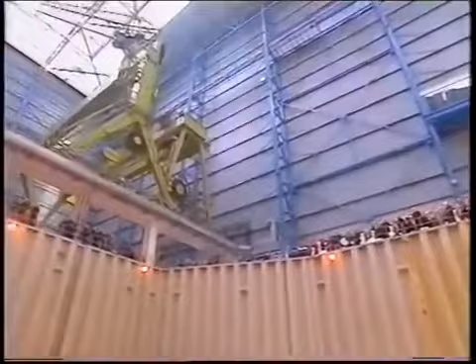The keel is to be laid. Job number 636 is also to have a name, announced by Tim Harris, chairman of P&O Cruises: after much thought, consideration, and consultation, we have decided that the right name for this ship is Oriana.

It is as if a flag has dropped to start a race. The band strikes up a quick march, and as the guests go upstairs to raise their glasses, the first sections of the new ship downstairs are lowered into place. Construction starts before a bowl of celebratory soup is served.

It was at the end of the 1980s that P&O took the first bold steps towards ordering the first cruise ship ever to be custom built for the British market. It would have to be the biggest and fastest for almost a generation. Long before the contract was signed in December 1991, P&O had their own team working in Germany.

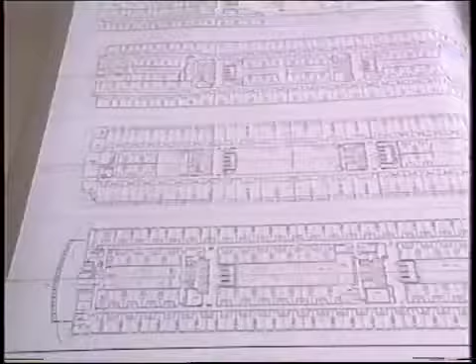Oriana is a ship with computers in her genes. Most of the design was done by computer, and computers will eventually run her. During construction, 15,000 documents a year are generated. For months, the ship has existed only on paper, in 6 loose-leaf folders codenamed Gemini.

Charles Arkinstall, Director of Fleet Services and one of the principal architects of the new ship: Well, this document really is the key to the successful building of the vessel, because they define in full detail what the ship will comprise of, how the shipyards will build it, and the standard to which they will finish it. It's a very important phase of the project because it's the complete definition of the vessel. The specification, which we agree with the yard, covers all aspects of the building of the vessel.

For example, we could look at the specification for painting the vessel, which we define page by page, how each of the different parts of the vessel will receive the paint treatment, which in the outline specification is probably covered in a few lines. Just on paint there are 22 pages, which converted into 22,000 gallons of paint.

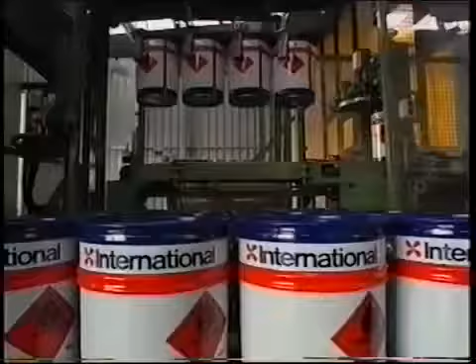The specification required it to be environmentally sympathetic. P&O insisted on products that were free of tar, tin and solvents. The paint was made in Newcastle upon Tyne.

Other parts of the ship came from all over Europe. The galley equipment from Poland, a village not far from the ancient city of Poznan. The stabilizers from Edinburgh. Carpets from Kidderminster, and engines from Augsburg in Germany. They were big diesels, built by MAN B&W, on the site where in 1897, Rudolf Diesel made his first engine.

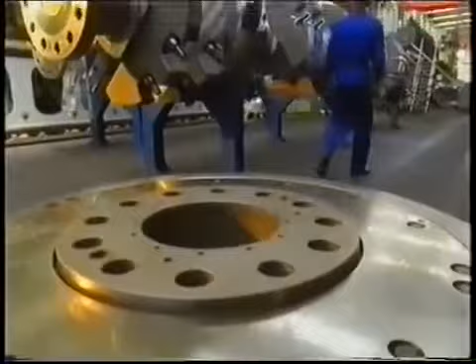Oriana's power plant is unique. She has 8 engines, 4 to propel her, and 4 auxiliaries generating her electricity. The main engines are massive. The 2 biggest at 216 tons are the size of small ships. All were run up to full power on the factory test bed.

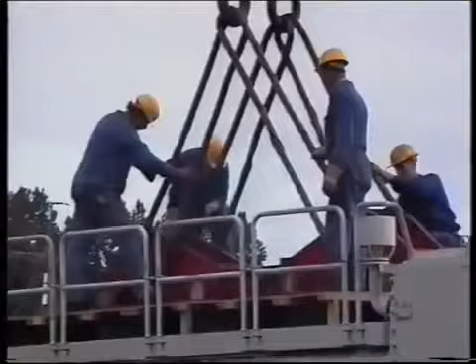The engines were delivered by barge. More than 70% of the ship came from outside the yard, a high proportion. Each part had to be completed and brought to Papenburg on time to meet the construction timetable. The logistics of this were one of the most intricate, if inconspicuous, aspects of the project.

But we are getting ahead of ourselves. 10 shipyards bid for the Oriana contract, their quotations ranging from £190 million to £290 million.

Charles Arkinstall: After receiving the quotations, we identify which of the yards we feel are able to work with us to produce an acceptable design and a price level which we feel is competitive. We chose Meyer Werft because we felt they had the right combination of price, quality and design.

The managing director of Meyer Werft is Bernard Meyer. The shipyard was founded in 1795 by my grandfather, so I'm the 6th generation, and the yard stayed all the time in the Meyer family. The shipyard was founded, of course, to build firstly wooden boats, to bring the peat from Papenburg to towns like Emden, Bremen and Hamburg.

Once there were 27 shipyards in Papenburg. Only Meyer's has survived. They alone converted to building ships in steel.

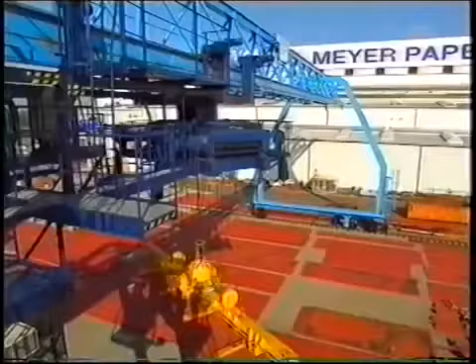It took 15,000 tons of steel sheet to build Oriana. Once the steel arrived at Meyer Werft, it would not leave again until it floated out in the finished ship. Every phase of the construction is done at the yard, undercover.

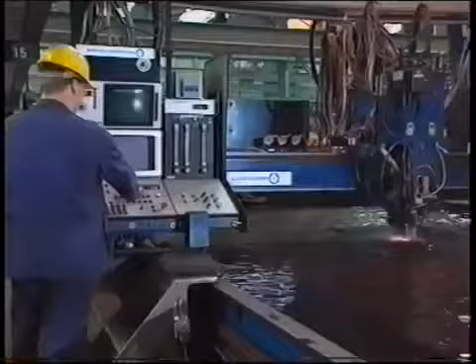Lasers guided from the computer designs cut out the sections with astonishing accuracy and speed. Every aperture, ducts, holes, pipe runs, doorways and cable route is allowed for.

Timber supports have never been bettered, although today's technique is to build ships in big prefabricated blocks. They are assembled from the cut and shaped steel right alongside the construction dock.

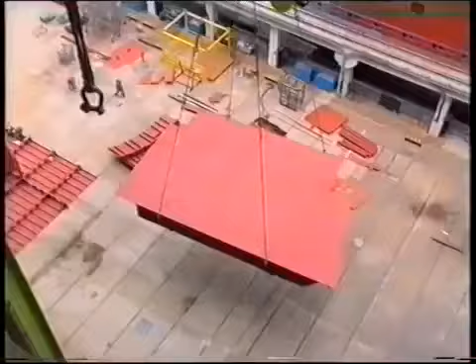Meyer Werft's cranes are as critical to the yard's success as the covered dock itself. One can lift 600 tons.

Gradually the ship takes shape. The terraces exposed now will be the theatre.

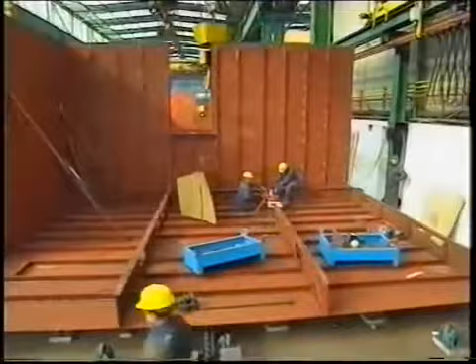The process is a production line. Each block has its own construction schedule, usually about a month. On the date when it is completed, it is swung over the dock and lowered onto the hull with the delicacy of a model maker.

In a way, the minutiae of shipbuilding is as impressive as the gargantuan side of the project. There are nuts and bolts and men at benches, as well as bits weighing hundreds of tons. In the world's largest indoor construction dock, there is still a place for the self-tapping screw.

P&O knew the ship they wanted, but it was the designers who would show them how to achieve it. Robert Tillberg, a Swede, is one of the world's foremost marine architects. He was appointed the coordinating designer. In the past, most of the ships with which he has been involved were built for American passengers.

The brief here was unequivocal. Oriana was to be British. I think the differences are very complicated. It's a way of behaving on board and the preferences they have. The color schemes for British passengers can't be the same as for the American passengers because they have different experience, etc.

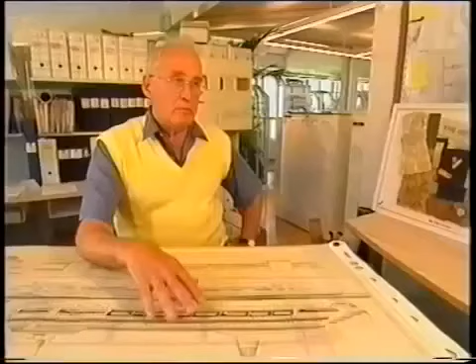At this stage, he was working on the theatre and its Tudor Rose motif. In the brief, it was mentioned that the British passengers and this ship should have more public rooms, but smaller. And instead of building a big show lounge for Las Vegas shows, we are now building a typical London theatre.

Petter Yran, a Norwegian, designed the cabins. He too had to discover the British style. So we had to find out and look at interiors and designs from England to try to find out the significant things that an Englishman would like to meet when he goes into his cabin, which is the area that I'm designing. And we have then not copied any English pub or English classic turn-of-the-century interior, but still used a lot of wood.

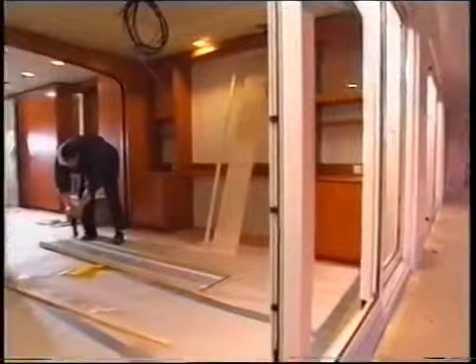Warm colors, put a lot of shelves and small places to put things, etc. Brass we use. So there is a flair of what we could think as a modern ship, but with an English touch to it.

Even John McNeece, the British member of the design team, had to brush up his understanding of his fellow countrymen. The first question he asked himself was, who was the ship being designed for? I had to answer it with genuine, researched facts. And therefore I did like to go into the pubs in Middle England and go into the restaurants and look at the windows of the estate agents to see the sort of houses and so on.

I can describe it by saying it's not as flashy as an American ship. It's more subdued, more elegant, more timeless. Most of the inspiration I got at the start, I drew from Canberra, which is a very fine old ship, and I understand very popular amongst the British passengers. But our aim is to create a ship for year 2000.

In July 1993, Lord Sterling had his first real indication of how Oriana's character was shaping. Among those with him, the man who will have to sell Oriana cruises, marketing director David Dingle.

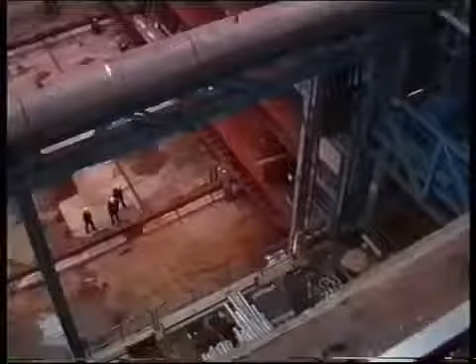Oriana's first voyage was on dry land. In her day, she will encounter bigger rollers than these. Driven by hydraulic jacks, the 4,000-ton structure was repositioned 50 meters down the dock, moving at imperceptible speed.

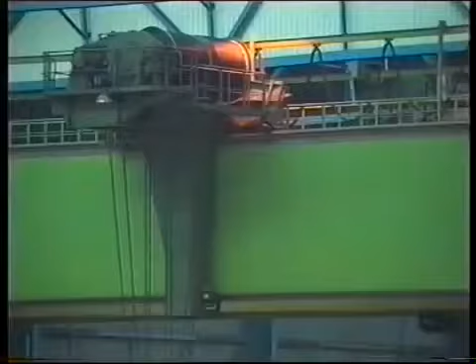Of the 49 prefabricated blocks from which the ship was assembled, Block 16 was the heaviest at 722 tons. This was the one on which the engines would be mounted.

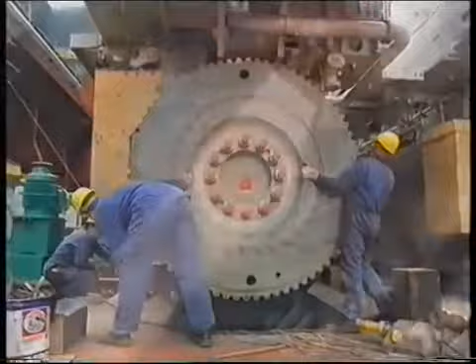The four main engines, which drive the propellers, have a combined output of 54,000 horsepower. They cost several million pounds and stand as high as a house. In the ship, they will be placed side by side in pairs, a configuration touchingly called father and son.

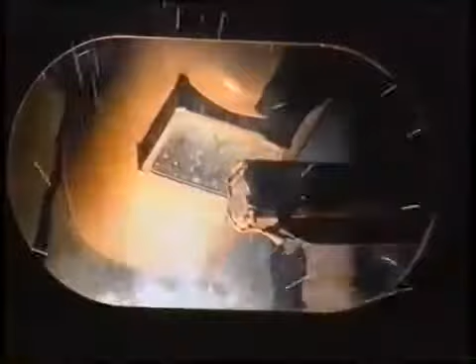It is the autumn of 1993, seven months into the build, but five years from when the idea of a new superliner was mooted. This, in fact, is the quick bit. It is all the planning, budgeting, modifying, calculating, and agonizing that goes on before the first weld is ever made that takes time.

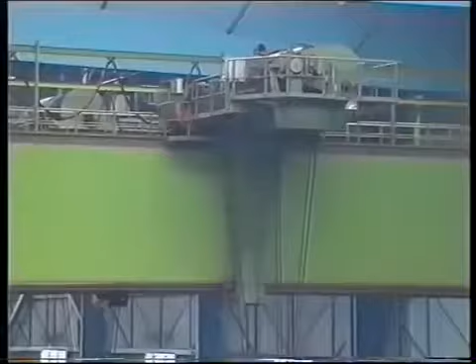Behind the theatre, the forward lifts are now discernible. Two more decks, numbers 8 and 9, are swung into place and lowered like a lid on the Theatre Royal. A section like this weighs about 450 to 500 tons.

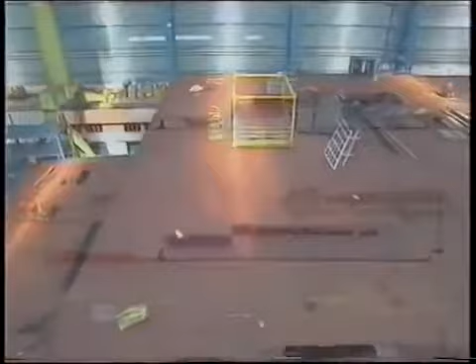The 680-seat theatre would eventually be acclaimed as Oriana's single most outstanding room. But so large a space, without any stiffening pillars to interrupt the audience's view, gave the yard's structural engineers major problems. By strengthening the surrounding steelwork, they were able to redistribute the stresses round what, to them, was a cavern halfway up the ship.

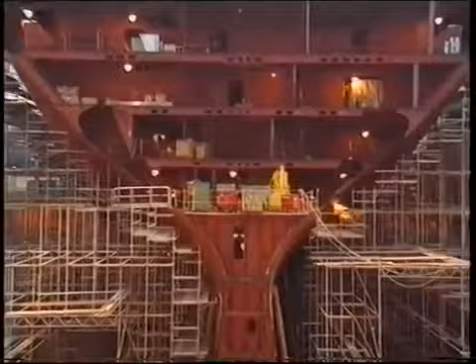These are the tunnels for the bow thrusters. Oriana's draft of 7.9 meters enables her to visit a wide range of ports, while maintaining her seaworthiness in every ocean. Like other world cruisers, her 32-meter beam is dictated by the width of the Panama Canal.

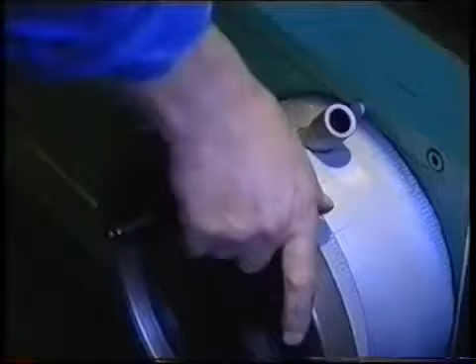The teeth of a bull wheel from one of the gearboxes gets a final polish. Each pair of engines is coupled to a gearbox which transmits the power to the two propellers. The gearboxes are a combination of brute strength and watchmaker's precision.

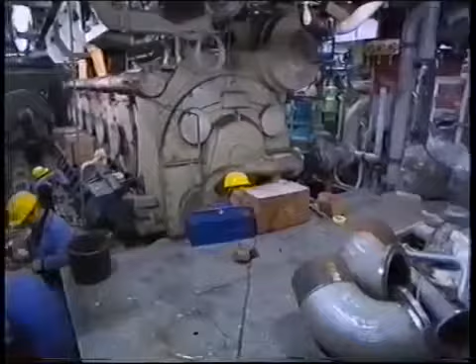February 1994, and we are now just over a year from delivery. Half the steelwork has been erected. The propeller shafts have been eased into their bearings, one of the trickiest operations, and the complex business of fitting out the engine room is underway.

Throughout the two-year build, the P&O project team of naval architects, engineers, and the people who will eventually run the ship are constantly involved in design decisions and quality control. We're at a stage when there seems to be almost as much ship in the assembly area ready to be craned into position as there is welded in the construction dock.

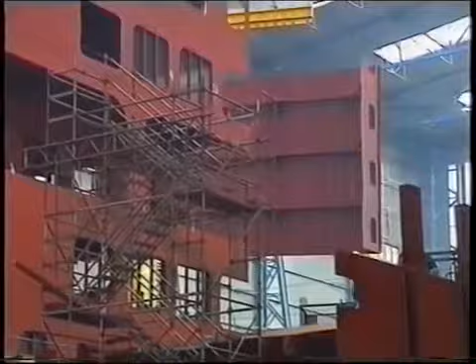The outside of the ship is being prepared for painting. We're in what will be the Peninsula Restaurant. One of the advantages of the building block technique is that as soon as a section has been added, work can start on the interior.

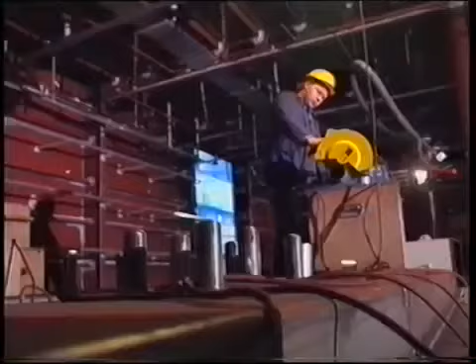Passengers will be on their way to their cabins down this corridor in 14 months' time. And here the blue boiler suits will be replaced by the white uniforms of a brigade of chefs. This is going to be the galley.

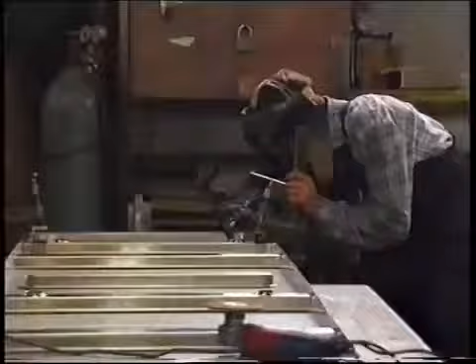If building the ship on a river seems incongruous, this farm in Poland producing the galley equipment is even more so. It's a highly specialized job, and this factory just outside Poznan is one of only a handful capable of tailoring stainless steel to the confines of cruise ship galleys. The equipment has to be very strong to stop it distorting from the movement of the ship, and hard wearing.

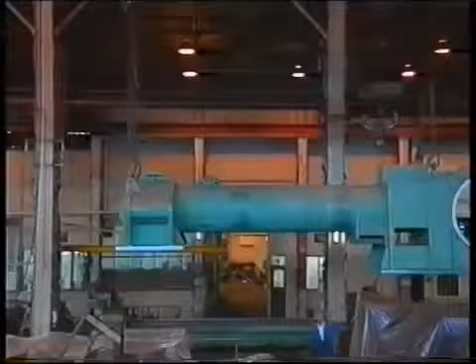The bucolic scenes should not mislead you. From Poland to Edinburgh. No British yard could compete for the Oriana order, but one of the proudest names in British marine engineering built the stabilizers. Brown Brothers made the first ship stabilizers in 1935.

Extended in heavy seas, they work like an aircraft's ailerons. As the ship rolls, the fins tilt to correct it. Oriana's are the biggest stabilizers ever fitted to a ship, and one of the heavier items of traffic to make the journey to the docks at Leith. They were delivered to Papenburg as complete assemblies, great boxes of hydraulic tricks. They were taken from their barge and welded into the spaces left for them in the sides of the ship.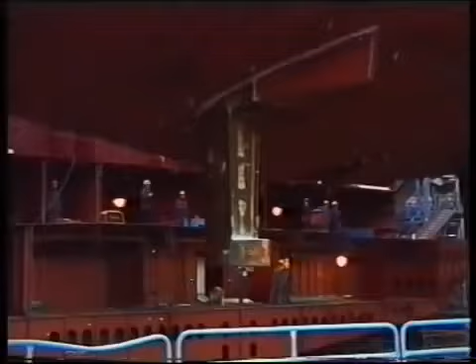Part of the stern is swung into position. The structure being lowered here will have the port rudder fitted to it. The windows are to the captain's quarters under the bridge.

The bridge itself is added. Despite the preference of the electronics engineers, Oriana's first master, Commodore Ian Gibb, insisted the bridge had open wings. There are times when a captain needs to feel the wind on his face.

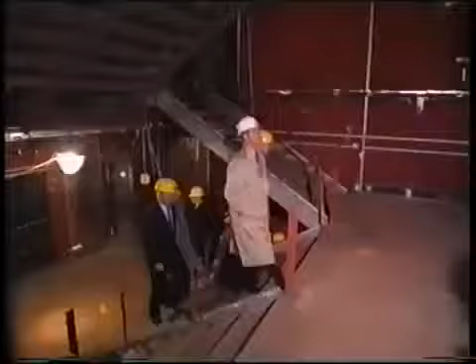The 8th of April 1994, a year and a day from the maiden voyage. Lord Sterling and Bernard Meyer tour the ship, their route marked by big yellow footprints painted on the deck. We have a container harbour. It's Lord Sterling's first sight of his investment. His inspection is thorough, as befits a man who has taken a direct interest in every phase of the ship's design and construction. He had strong opinions on the layout of the stern.

He had the restaurant ceilings raised, and his was the final approval for the furnishings. We have actually planned for that. We did comment that the back needs more upholstery. It doesn't have any relationship to the chair itself. Yeah, and the brass bit has no relationship to either. The brass goes, we're not having the brass anymore. No, but I don't...

Mock-ups of the interior have been prepared, including one flight of the main staircase. And this was an early version of the Oriental restaurant. That one's a little wide. But if you do it on the canvas, it works quite well, and they've got a similar arrangement. There's not many, it does actually work. Especially if you put the...

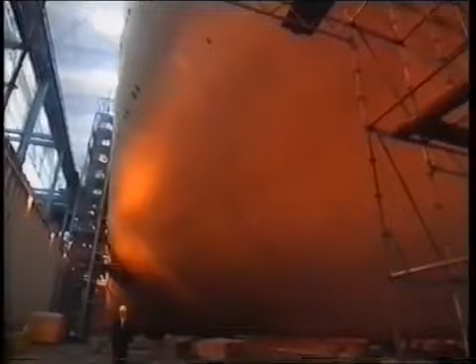Oriana will be the fastest ship that has been built in the last quarter of a century. Another of Oriana's prime movers, P&O Cruises Managing Director Gwyn Hughes: We want the ship to be able to get to destinations in a reasonable amount of time that no other ship can manage. She's been designed for speed, and behind us you can see part of the keel coming down into position. This aspect of the ship really is the unique aspect of the ship, because the sleek lines at the bow section of the ship are part of what enables the ship to attain the speed, even in ocean-going conditions.

One of the most critical components of any ship is its propellers. The obsolete coins of Eastern Europe were smelted by Oriana's propeller makers. It gives a whole new twist to communist revolutions.

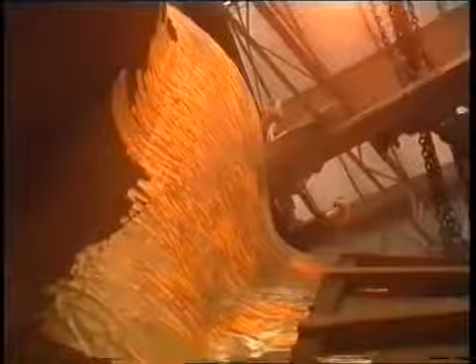Inevitably, they are big, taller than a double-decker bus. But it's not so much their size as their science which is exciting. They have variable pitch, which means their blades can be swiveled to drive the ship full ahead or full astern without having to reverse the engines or adjust their speed.

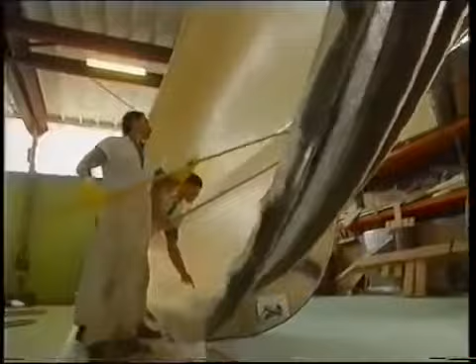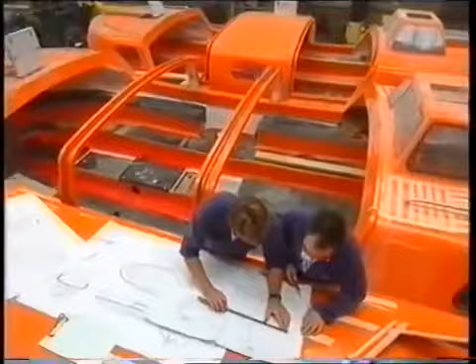The lifeboats were made in Holland. Boat building in glass-reinforced plastic is very different from the process of welding steel. In its way more laborious, as layers of fibre matting are added. Oriana has 8 partly enclosed lifeboats, 2 lifeboat tenders, 4 tenders, and 2 fast rescue boats. They would be dispatched if someone fell overboard.

British diesel engines here. On board, the lifeboats can be launched from either side of Oriana, even if she has a 20-degree list. It's back to Newcastle for the life jackets. The test is to check that they will keep you upright, carried out in the local pool.

Nice work if you can get it, this guinea pig business.

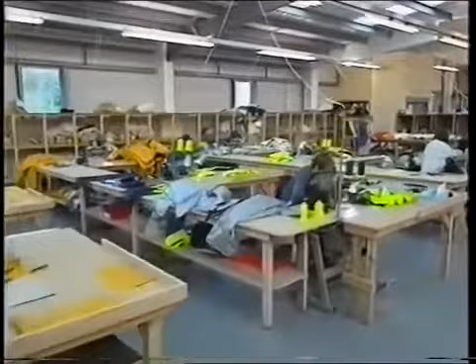Oriana will carry more life jackets than her maximum complement of 1,975 passengers and 760 officers and crew. The life jackets meet safety regulations which won't even come into force until the ship is 2 years old. The same goes for her fire protection, a computerized system which is more than state-of-the-art.

Charles Arkinstall: We've also put in a system which we believe is entirely new to ship design, which calls for smoke control in the event of a fire. We have all the systems on board which prevent the fire occurring, but should this take place, we have introduced a system which will enable the ship's officers to contain the fire to the smallest possible area.

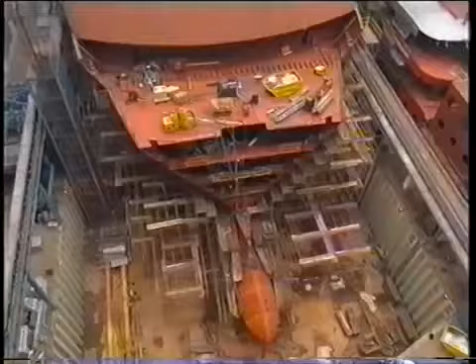But ships today not only have to keep their passengers and crew safe, they also have to play their part in protecting the planet. Oriana is built to keep the sea green. All waste is processed on board, so wherever her voyages take her, she will leave every place she visits just as she found it. Gwyn Hughes:

She will be taking people to areas of the world that they will not be able to get to otherwise. The world is in many ways becoming a smaller place. Areas are becoming overcrowded. Sea travel is the one way in which one can get to isolated areas of the world and be at peace with the environment. And we anticipate that that will be even more important by 2020 than it is today.

And that is what Oriana will be doing, and she's designed to do that throughout the early part of the next century. She isn't just designed for 1995. Nowhere is that more evident than in her navigation systems. Oriana could, in theory, complete any leg of a cruise without human intervention. Not that she ever would, of course.

Spring 1994, and we are now within 12 months of completion. The ship is on schedule, but it's still hard to imagine her at sea.

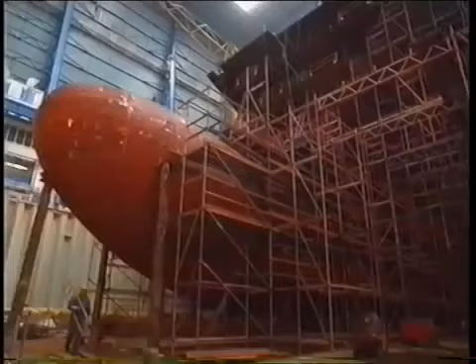By May, 92% of the steel has been erected, and the bulbous bow designed to cleave a way through heavy seas is in place. Bow and stern thruster motors are now installed, and painting is well underway.

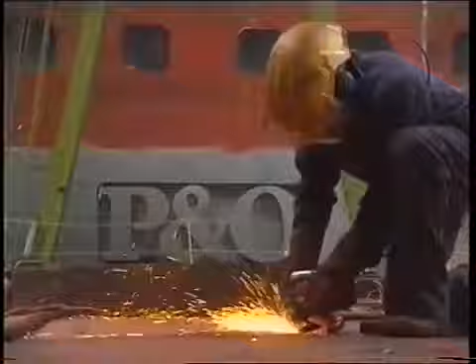Construction has reached high up the superstructure. Above deck 12, steel gives way to weight-saving aluminium. In June, Block 42, the upper part of the bow, is fitted. It slots into place with a steely snarl.

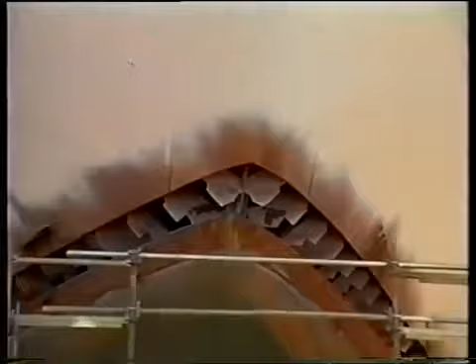Tradition amid the high tech. Teak decks, 2.5 acres of them.

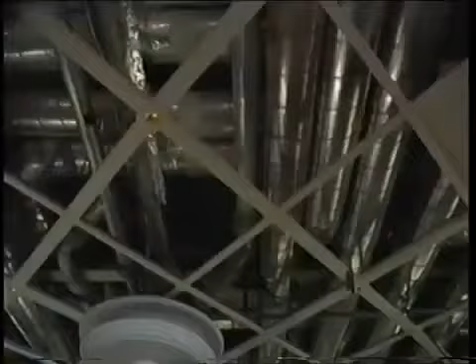Oriana is starting to turn on the style, and John McNeice reflects on the compromises designers have to make. It always is a fight, a battle between the space that the designer wants and the space that he actually gets at the end of the day, because there's so much air conditioning, so much electrical and plumbing works, etc., which occupy very substantial portions of the ceiling space, that variations in floor levels, for example, that you might like to see, you cannot have because of the restricted head heights. That is certainly the single most difficult aspect to cope with in designing on-board ships.

A new band of workmen now inhabit the yard. The welders and steel erectors are retreating. The carpenters and finishers and decorators are in.

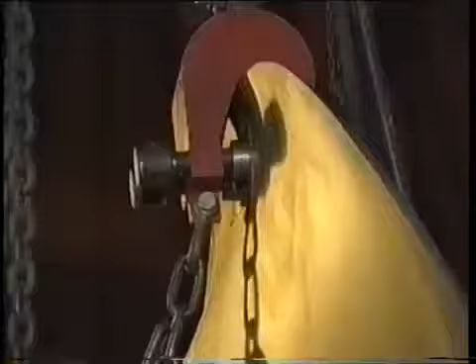Not that heavy engineering is quite over yet. The propellers have to be fitted to the ends of their long shafts. They each weigh 32 tons and have been computed to deliver an elaborate combination of economy, efficiency, and power.

Graceful as sculptures, it's easy to forget that these are among the most technically complex pieces of design on the whole ship.

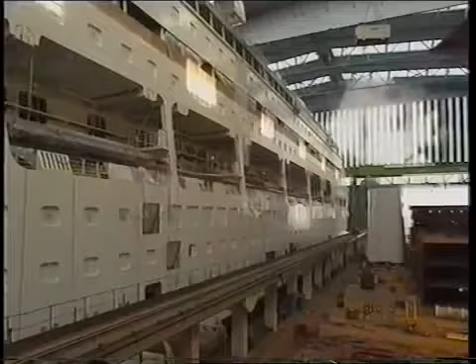The funnel has arrived. It's too tall to put on in the covered yard.

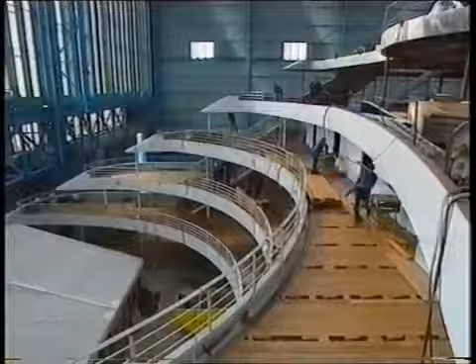The distinctive galleries round the stern, above one of the ship's 4 swimming pools, are getting their cladding of teak. As well as having the largest pool, Oriana has more open deck than any other cruise ship. Something else the British like. And teak not only looks good, it's exceptionally hard-wearing. It comes from plantations, not rainforests.

Joiners fit more teak round the pool.

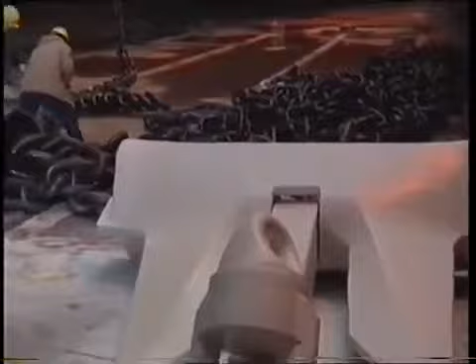January 1995, and Oriana weighs anchor for the last time on dry land. Her hull is now completely painted.

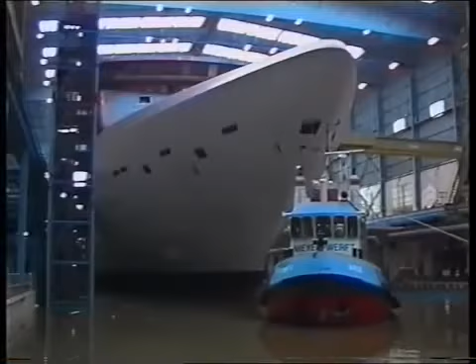And the dock is flooded. The dock where 2,000 men have labored for almost 2 years, where the keel laying ceremony took place, where the band played, will soon be full of water. Oriana is to enter her natural element. A tug has been hoisted over the top of her to guide her safely into the river.

The bow, which went through so many designs to get the ship looking right, is no longer Block 42, but the prow of the world's newest superliner. At last she's afloat, and like a priceless pupa emerging from its chrysalis, Oriana, here speeded up 35 times, makes her entrance to the world on a bitter winter's day.

Crowned with her funnel, she now looks like a ship, an important consideration for P&O. Charles Arkinstall: We have tried to keep the ship as a more traditional-looking vessel, and we believe the profile has ample demonstration of that.

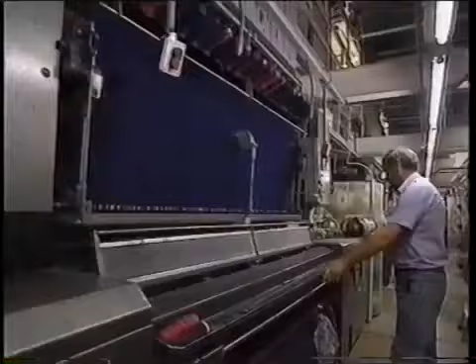But if the ship is beginning to look finished on the outside, inside there is still much to do. There is the matter of carpets, for a start. Brintons of Kidderminster won the contract from 20 competitors worldwide. Again, computers had a part in the design. Robert Tilburg's Tudor Rose is destined for the Theatre Royal. Nearly 1 3/4 square miles of carpets were made and delivered to the yard over 18 months.

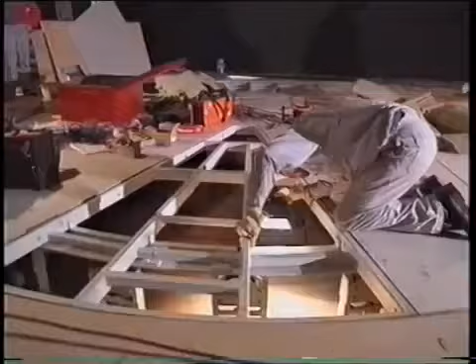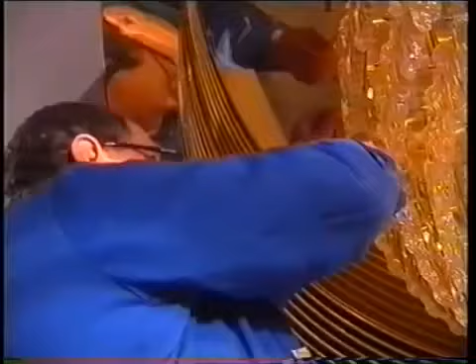In the theatre, the revolving stage does a turn. In modern shipyards like Meyer Werft, specializing in passenger vessels, the carpenters, cabinet makers, electricians and electronics engineers now easily outnumber the traditional shipbuilding craftsmen, those who work in steel. That is one measure of the amount of work that remains before the ship is finished.

Restaurants, this is the Oriental. Lounges and all the public areas now have to be civilized. The famous waterfall, tested on Canberra, tumbles through Oriana's atrium, one of the hard hat areas of just a few days ago, now being transformed by soft furnishings.

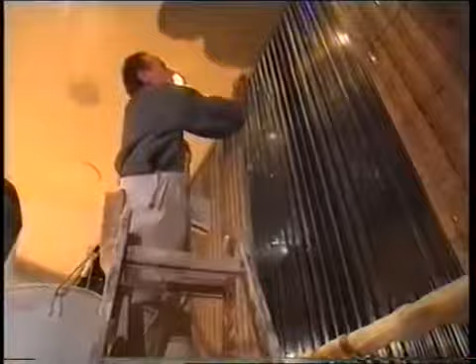The lifts have been in place for some time, but the checking never stops. All that stainless steel fabricated in the farmyard in Poland is being fitted in the galley. On the bridge, electronics experts are making the connections that will give Oriana the most advanced navigation and control systems of any cruise ship in the world.

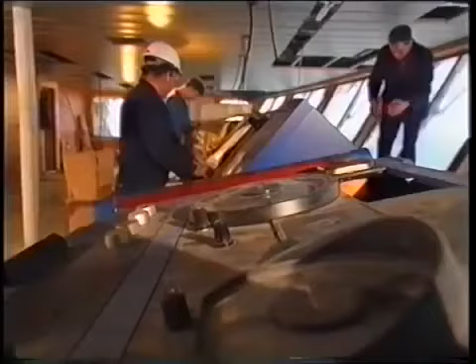The Oasis Fitness Centre is appropriately getting a workout from fitters. And the Crow's Nest, soon to be a favourite vantage point for passengers, is having its big observation windows trimmed. More carpet is laid. Throughout the ship there are 32 different designs.

The Steinway on which the classical recitals will be performed in the Curzon room makes an undignified entrance for a grand piano.

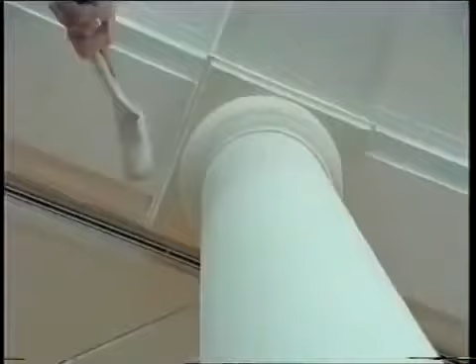Back now at the top of the ship in the self-service restaurant, the conservatory. It is so light that architect Robert Tillberg refuses to refer to windows here. He calls them glass walls. Turn the other way, and the vista is of an English garden depicted on a mural.

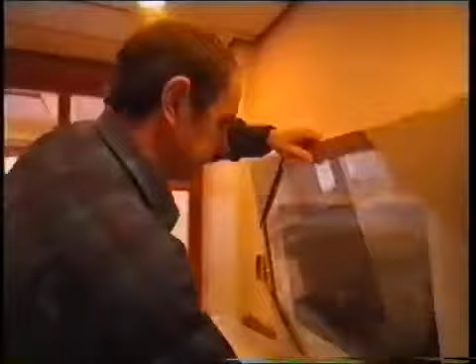Like the great houses of yesterday, Oriana, the great ship of today, and her owners, P&O, have been considerable patrons of the arts. There are almost 3,000 pictures in the ship, more than hang in the National Gallery. The man behind the collection is Tom Tempest Radford.

Morning, Kip. How are you? Yes, thank you very much indeed for sending me that print. I like it a lot. There's just a few things that I wanted to go over with you.

A fine art consultant who advises corporate and private buyers, he was responsible for acquiring all...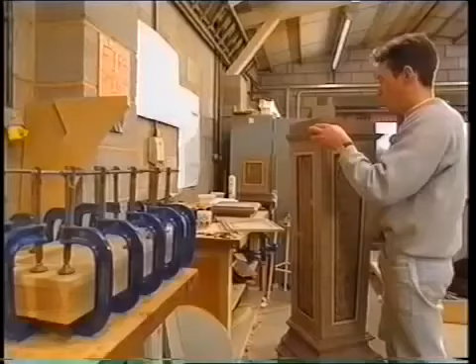David Linley in the workshop is Princess Margaret's son, Lord Linley, in more formal life. What we're designing for, although it is a ship, predominantly it's a public area, and that means extra care in the finishes and the polishes that we use, because with a lot more people using them, the wear and tear will be higher, and therefore all the edges, the corners - a lot of thought has to go into the amount of use that these pieces of furniture will have.

I think that, on a ship this size, the fact that it is a ship, from our point of view, takes a very small role in its design, apart from obvious things such as the fact that it'll be screwed onto the floor, or things will be screwed onto it, and one has to make allowances for that. Otherwise, what you're really looking at is the ambiance it's going into. What I hope the furniture will add is an air of calm.

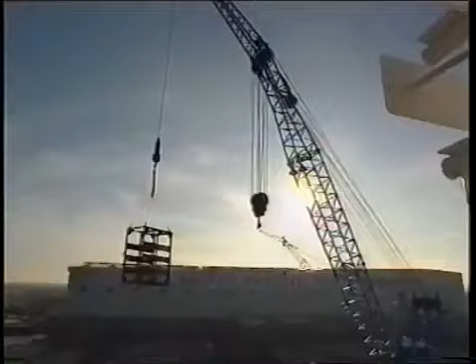Calm is not a word one would ever apply to successful shipyards. As the cranes swing the last heavy components onto the ship, it's worth taking stock of the task that Oriana is being set.

Single-handed, she must capture 10% of the British cruise market. In America, a new ship has to win only 2%. But the number of British going cruising is growing faster. Besides, P&O practically invented it.

Robert Tillberg reflects on comparisons with the old days. The modern ships are in one way more simple, but in another way they are more luxurious, because when you look at the old pictures from the old ships, Queen Mary, etc., or any of the famous liners, what you see is just the first-class environments. Today, the whole ship is as luxurious as that. And that is a very big difference.

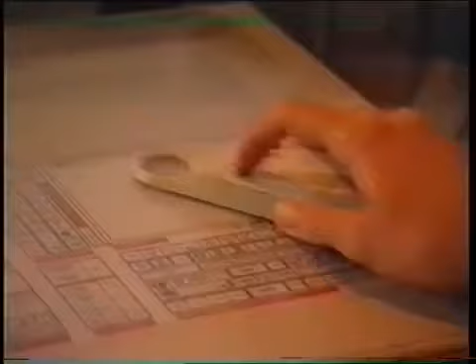I like to think that our approach to the environment of the spaces, the ambience of the spaces, has been arrived at using interesting shapes, good colour, strong, bold lines, balancing tradition with the modern emphasis of technology. And I think the sparkle comes from how you put that together.

Oriana is beginning to sparkle. The spectacular inlaid timber dance floor in Harlequins has exceeded the promise of its computer graphics.

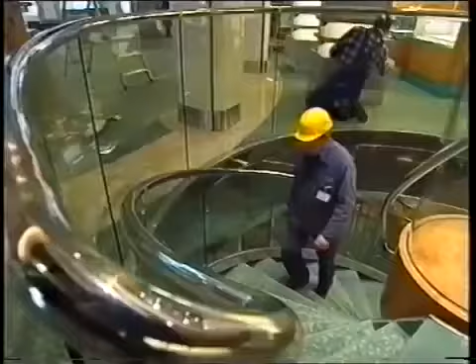The workmen are starting to look out of place in the atrium. Robert Erskine's bronze, now precisely positioned, attracts its first admirers.

And Lord Linley's furniture has found its home. The grandfather clock in the Thackeray room uses mainly English woods, oak, walnut and sycamore, like the great octagonal table in the library and the other pieces.

Even the grandest of the older generation of ships had nothing to compare with Oriana's gymnasium.

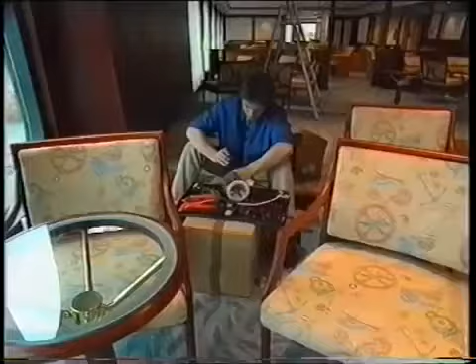Elsewhere, though, her pedigree is unmistakable. On every deck, the story is the same. The armies of craftsmen have gone. Just the odd figure is left, doing not much more than tidying and titivating.

In fact, the ship, which so recently was all noise and hammering, is now eerily empty and quiet. No more bursts of welding sparks, no more screeching drills.

In the Curzon room, the serenity is reflected in Alice Kettle's embroideries, some of the largest in the world. Furniture for the purser's desk, the seat of information, you might say. The Curzon room piano has recovered its dignity.

Peter Pan's playroom is poised to lose its tranquility. Anderson's lounge, named after one of P&O's founders, will always have an air of decorum, being modelled on a gentleman's club. Lord's Tavern, which continues the tradition of Canberra's cricketers' bar, is more clubhouse than pub.

All the Theatre Royal needs now is an audience in their seats and a show on stage. This is the only time in its life it will ever be dark. The decks are being cleaned for Oriana's first social occasion.

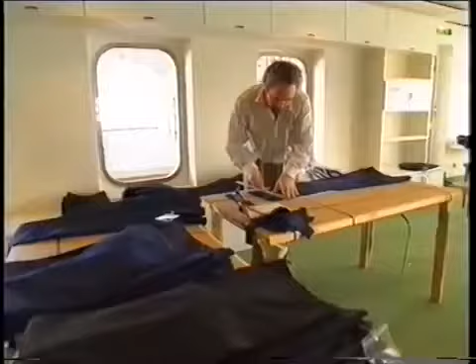The maiden cruise is less than 2 weeks away, and the ship must take on its enormous inventory of stocks. 2,500 pairs of trousers have arrived. All have to be finished to fit individual members of the crew.

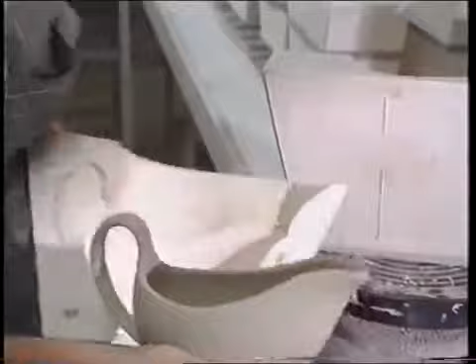Cartons of china are taken on board. Wedgwood, who like Meyerwerft are celebrating their bicentenary, won a big order. They made the china for the 2 main restaurants: 86,000 pieces. The washing up doesn't bear thinking about, or the price, more than £300,000.

Each piece bears Oriana's rising sun emblem, adapted from the P&O coat of arms. Glasses from which will be drunk 1,000 toasts, and which will slake 500,000 thirsts in a score of summers. Ravenhead supplied 75,000 pub glasses from their factories in Lancashire and Belgium.

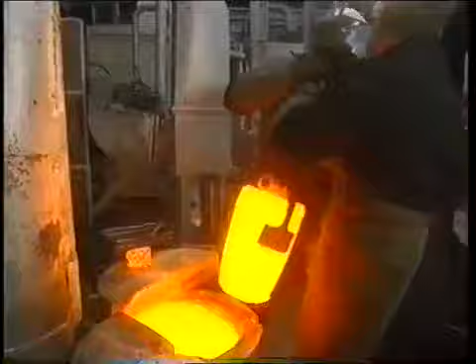Elkington of Sheffield had been making cutlery for P&O for more than 100 years, almost from the time when they invented silver plating in 1836. Before that, passengers either brought their own family silver or used the ship's cutlery of pewter or steel.

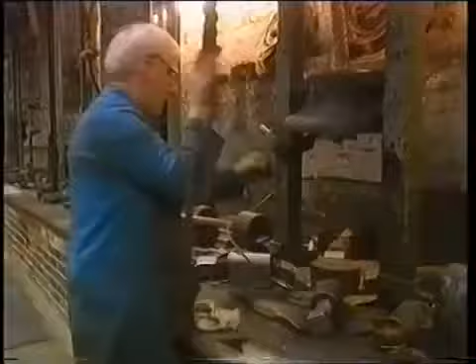Manufacture is nothing if not traditional. All the more impressive then that Oriana's order was for some 77,000 pieces, or 16 tons of silver-plated cutlery and tableware.

The ship has come through her trials with approvals and certificates flying. The German flag too, but only for a couple more days. Like a graduate just qualified with a fine degree, she must now make her way in the world. There are graduation ceremonies to be gone through first.

Oriana was born on a river. It seems fitting then that these last days of passenger-free sailing should be spent in rivers. From Hamburg she sails down the Elbe and along the coast of Germany to Emden, at the mouth of the Ems, the river on which she was built.

One last formality must be performed before the ship leaves Germany. Lord Sterling, Gwyn Hughes and Commodore Gibb are in Emden for the official handing over of the vessel. Bernard Meyer, representing the shipyard, joins Tim Harris, chairman of P&O Cruises, on the quay.

As Commodore Gibb comes aboard, the ship's company turn the decks in the stern into a theatrical grand circle. It is a spectacular moment. Who knows on what occasion it may ever be repeated?

On behalf of P&O, Tim Harris receives the ship's papers from Herr Meyer. And as the red ensign flies for the first time, Gwyn Hughes sums up 8 years' achievement. Oriana is uniquely British. It will be the first modern cruise ship that will operate out of British ports and will take the British cruise market into the 21st century, whilst retaining the classical elements of the British tradition of sea travel.